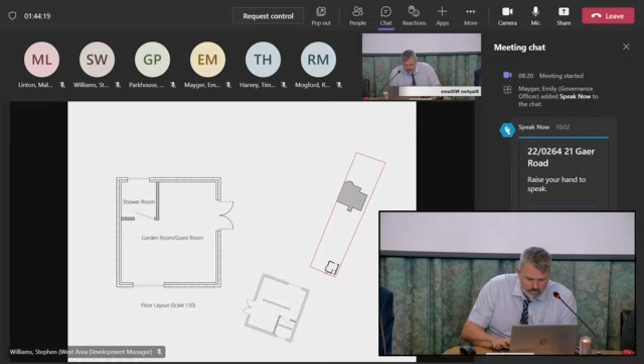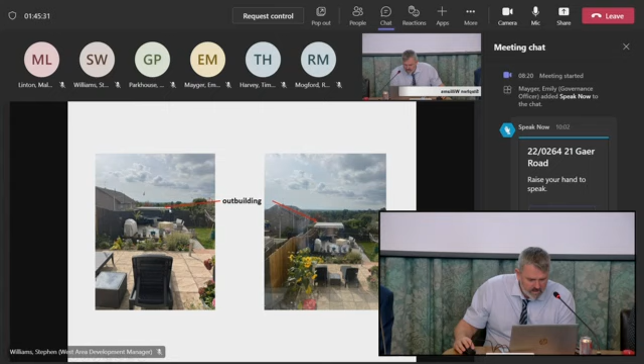These photographs have been taken from the patio of the main house. As you can see, there's a timber fence, and you can see the shed that's been erected. That's the elevation that faces into the garden, and you can see the timber fence dividing the building from the rest of the garden.

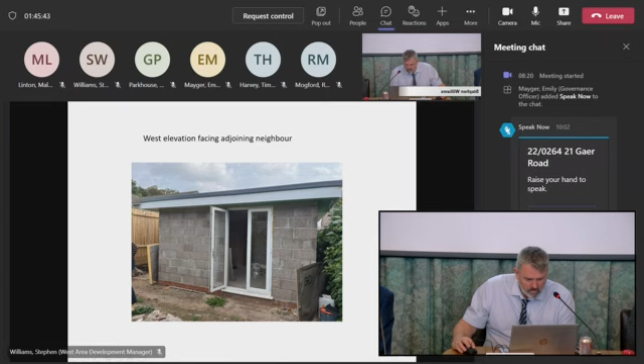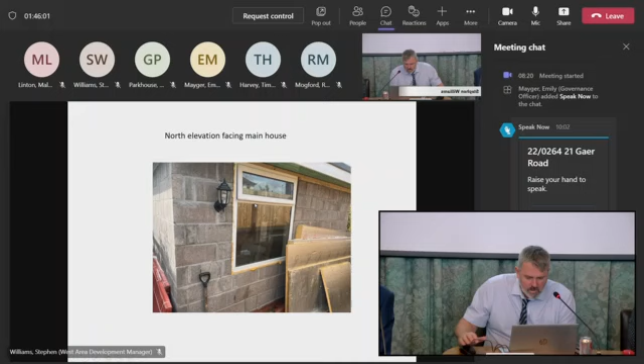That's looking from the building towards the west boundary. As you can see, the neighbour to the west, the adjoining semi-detached property, is well screened with this timber fence. That's the north elevation looking up towards the house.

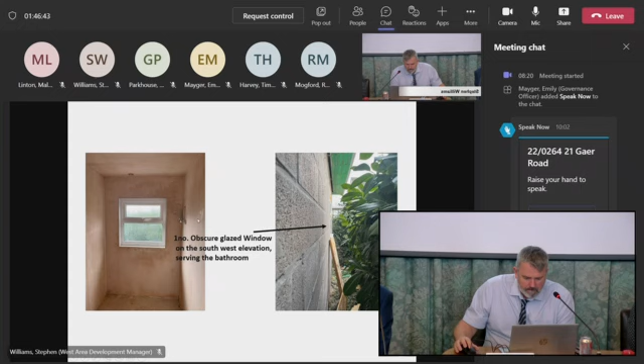As you can see, the properties in the distance are on Lansdowne Road. That window is the same one I've just shown you, looking up towards the house - it just looks onto this timber fence. This is the shower room with an obscure glazed window. You can just see the hedgerow on the rear boundary there that screens it from the neighbour on the other side, and this high laurel hedge that screens the rear boundary.

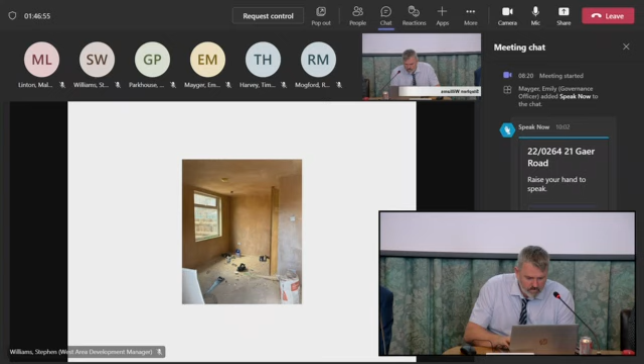This photograph - let me show you where this is taken from. It's a photograph taken from this property here, from this property here, so you can imagine the shed is there.

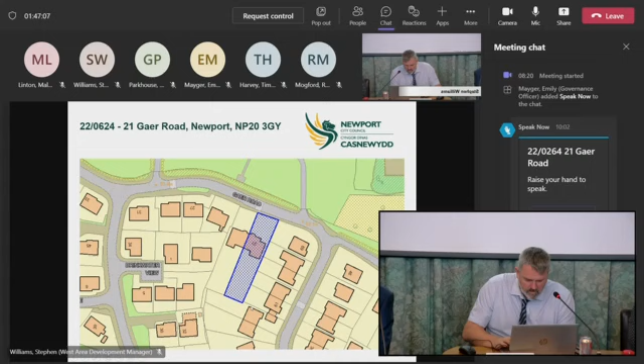So there you go, that's taken from that garden. You can see there's a drop in level, but it's well screened from the garden. You can just about see the shed there, set behind this hedge. That's taken from the bathroom window of this property, so you've obviously got a bit more of an elevated view of it.

So in terms of design, it's a relatively small building with a very basic design, but it's considered acceptable in this rear garden location. In terms of impact on neighbours, it's a relatively low-level structure, largely obscured from neighbours by existing boundary treatment. It's not overbearing, and it wouldn't cause a loss of privacy.

In terms of the use, a number of neighbours are concerned about the potential use of the building. I think they're wondering what's proposed in terms of subdividing it from the rest of the garden with a fence, and there's concern that it's potentially going to be used as a separate dwelling or a holiday let.

But the applicant has assured us that their intention is not to use it for those purposes. It is to be ancillary to the main house, to remain part of the dwelling, and we've imposed a planning condition to make sure it's abundantly clear that this is what we're approving.

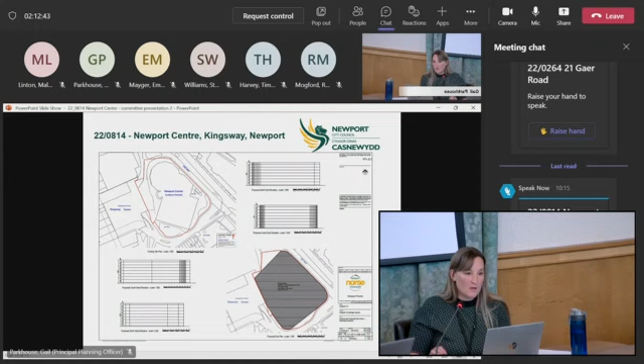Looking at ecology, protected sites and species, the site itself has very limited ecological value. The most notable feature are 4 cherry trees next to the junction with Usk Way and Emlyn Street, but even these have limited value and it's proposed to remove them. The tree officer has no objection, in favour of additional tree planting as part of the detailed landscaping proposals. We're also recommending a condition for a scheme of ecological enhancement, to be provided at reserved matters stage.

The site is in proximity to the River Usk, a special area of conservation with a European designation. We do not envisage any direct impacts on the river given its distance away, but there is potential for indirect impacts as a result of noise and vibration during construction, and any pollution during construction and operational phases.

Under the Habitats and Species regulations, we're required to carry out an appropriate assessment, contained within Appendix A of the committee report. In summary, it concludes that with conditions requiring a construction environmental management plan, a piling methodology and timing restrictions, details of foul and surface water drainage, and a contamination investigation, there would be no adverse impacts on the integrity of the River Usk Special Area of Conservation, either alone or in combination with other projects. We're required to consult Natural Resources Wales, and they've confirmed they agree with the conclusions of the assessment.

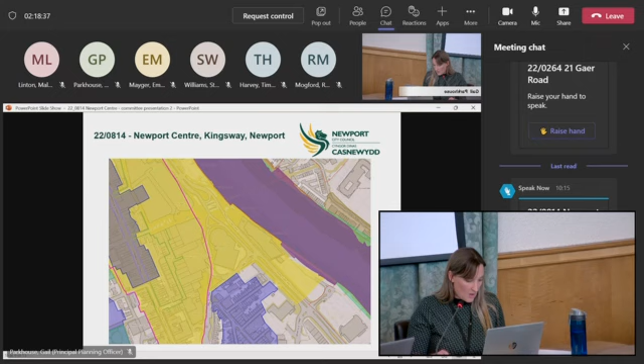On to heritage. You would have seen the late representation on heritage matters. In short, the Historic Buildings and Conservation Officer agrees that further consideration of impacts on the design and layout of the building on the conservation area can be given at reserved matters stage. To secure this, we're recommending a condition requiring submission of a heritage statement detailing how any negative impacts on heritage assets would be mitigated.

On archaeology, you would have seen the late representation from the Glamorgan Gwent Archaeological Trust, which confirms there could be archaeological constraints to the site, although unlikely given the likely disturbance caused by building the Newport Centre already. We've included their condition requiring a written scheme of investigation to be submitted.

In terms of contamination, a desk study has been submitted. It notes the historical industrial uses of the site, which include a foundry, warehousing, a canal, highways and railway lines. That desk study notes the need for further investigation, and this investigation and any remediation would be secured through a recommended condition.

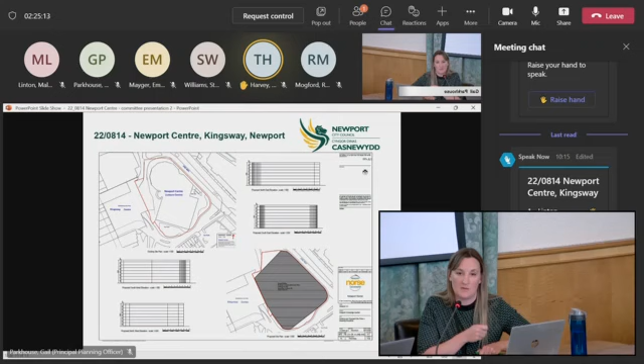Thank you, Chair. This is an absolutely fantastic opportunity. I recommend this proposal to the city centre. It brings a more modern building into the centre, whereas the building at the minute is outdated and can cost too much to refurbish. I think it's a great opportunity for us to add another modern building and bring more people into the city centre. I thank the officers for bringing up the shadowing effect that the proposed height of the building will have over the existing surrounding area, and also the setback they've asked for, which will allow for more green planted areas, seating areas, and it doesn't overshadow the road either. So yes, I do recommend this application.